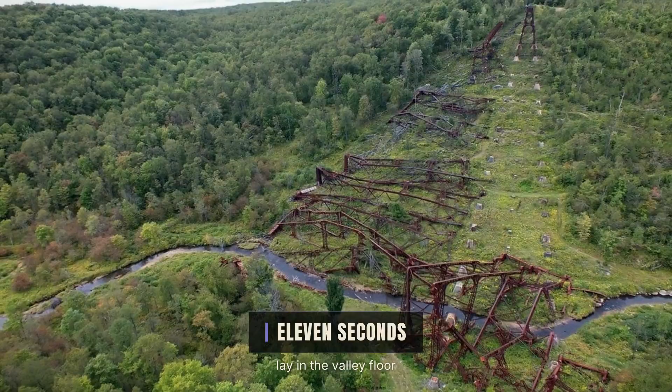At 3:15 in the afternoon on July 21st, 2003, the Kinzua Viaduct had already survived 121 years. It had carried 4-ton coal trains through Pennsylvania winters that froze the bolts in their sockets. It had outlived the railroad that built it, the company that rebuilt it, and the industry that made it necessary. 11 seconds later, 11 of its 20 towers lay in the valley floor, and the longest railroad bridge in the world when it was built had become a ruin.

The tornado that killed it was an F1, wind speed between 94 and 112 miles per hour, which this valley had seen before and survived. But at the base of the towers, where the anchor bolts held the steel to the concrete piers, rust had been working for decades. The bolts that should have held the structure to the earth did not hold. The towers that should have swayed and returned upright instead lifted, twisted, and dropped 225 feet to the sandstone bed below. The bridge was not empty that day by accident.

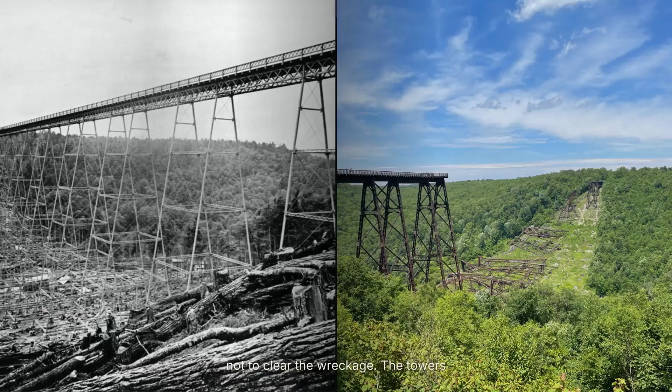A $10.8 million restoration project was underway, and the workers had been pulled off the structure. No one died. The National Park Service and the Pennsylvania Department of Conservation and Natural Resources made a decision afterward that still shapes the valley. They decided not to rebuild and not to clear the wreckage. The towers would stay where they fell, driven into the ground at angles the engineers who designed them never imagined, the rivets still tight in the iron, holding pieces together exactly as they had been assembled in the summer of 1882. Today, visitors walk the Kinzua Skywalk, a partial reconstruction that ends where the collapse begins.

They stand at the edge of what remains and look down at what came apart. The view is 301 feet to the valley floor, and on that floor, rusting in the open air, the towers lie exactly where they landed. The creek still runs beneath them. The hemlocks are growing back around them. The metal is turning the colour of dried blood.

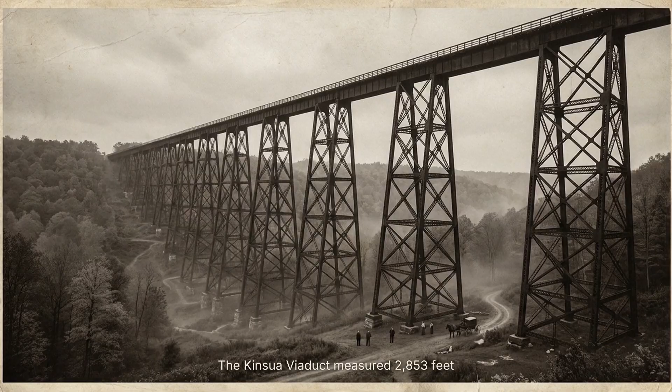The Kinzua Viaduct measured 2,053 feet from abutment to abutment. It crossed a tributary of the Allegheny River in McKean County, Pennsylvania, at a point where the valley walls drop away to a depth that made every alternative route unworkable. 301 feet. That was the number. Taller than the Statue of Liberty from base to torch. Taller than a 25-story building, and every foot of it in the original structure was wrought iron, pinned together by hand, hoisted into place by men whose names the railroad that hired them never bothered to record.

The collapse took 11 seconds. The construction took 94 days. The distance between those two numbers is the story. What kind of structure survives 121 years of Pennsylvania weather and 4-ton coal trains, then fails in 11 seconds to a storm that barely qualified as a tornado? The answer is in the valley floor. The answer is in the rust. The answer is in the decision made in the spring of 1882, when a railroad needed to cross a gap that should have been uncrossable, and a bridge company said it could be done in time that should have been impossible, and 120 men climbed into the air to prove them both right.

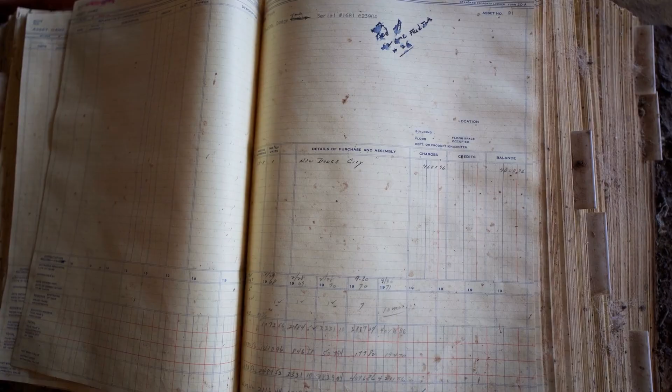The men who built the Kinzua Viaduct did not leave diaries. They did not write letters that survived. The railroad that employed them kept payroll books, not personnel records. What we know about them comes from the structure they left behind, from the wages the company recorded, from the 2 deaths that made the local newspapers, and from the physics of the work itself. The work tells you who they were. The work tells you what it cost them. The bridge stood for 121 years because they did it right. The bridge fell in 11 seconds because someone else, decades later, did not. But the falling is not where this story ends. The falling is where it begins.

In the spring of 1882, the New York, Lake Erie and Western Railway had a problem that was costing it money every hour of every day. The line connecting Buffalo to Pittsburgh ran through McKean County, and at Kinzua Creek the terrain forced a decision. The valley was 300 feet deep. The walls were steep. The creek at the bottom flooded every spring, scouring the sandstone bed and carrying debris downstream. There was no good place to build a conventional bridge. The supports would have to be impossibly tall, or the approach grades would have to be impossibly steep.

The existing solution was an 8-mile switchback. Trains heading south from Buffalo would descend into the valley on a series of grades that doubled back on themselves, cross the creek at the bottom, then climb out the other side on another series of switchbacks. The locomotives of 1882 could handle it, but handling it cost time. Every trip through the switchback added hours to the journey, every hour added cost. The coal coming out of the Bradford oil field was worth money only if it reached the furnaces in Pittsburgh before the customer found another supplier. The switchback was bleeding the railroad dry.

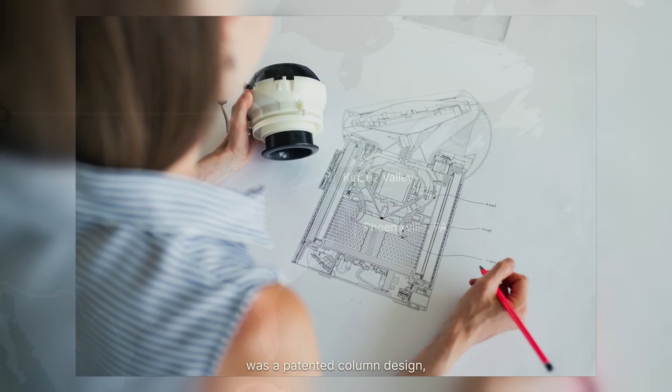The Phoenix Bridge Company operated out of Phoenixville, Pennsylvania, about 280 miles southeast of the Kinzua Valley. The company had built railroad bridges across the country, and its specialty was a patented column design, a hollow cylindrical shaft made of curved wrought iron segments bolted together around a central core. The Phoenix column was lighter than solid iron, stronger per pound than any competing design, and crucially it could be manufactured in sections small enough to ship by rail and assembled on site without heavy equipment.

The company's chief engineer was Adolphus Bonzano. When Kane asked him if the crossing was possible, Bonzano reportedly replied, "We'll build you a bridge 1,000 feet high if you'll provide the money." The quote appears in multiple accounts of the project, and whether or not Bonzano said it exactly that way, the sentiment was accurate. The Phoenix Bridge Company believed it could do what no one else had done. It believed it could cross the Kinzua Valley in a single span at a height that would clear the worst of the spring floods, in a time frame that would have the coal moving before the summer was over.

The contract was signed in the spring of 1882. The terms were specific. Construction would begin on May 10th. The bridge would be complete and ready for rail traffic by August 13th, 94 calendar days from the start of construction. The contract value was somewhere between $167,000 and $275,000, depending on which source you consult. The Erie Railway's annual report for 1882, filed with the New York State Railroad Commission, records a completion penalty clause, though the exact terms of that clause have been lost.

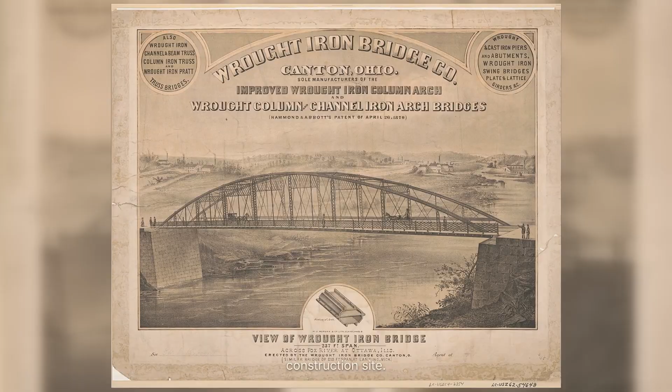Every piece of iron that would become part of the bridge had to be shipped by rail to the nearest siding, then hauled overland to the construction site. Every man who would drive a rivet or pin a connection had to be housed, fed, and paid in a valley that had no town, no store, and no infrastructure of any kind.

The Phoenix Bridge Company did not build scaffolding to the full height of the structure. Scaffolding 301 feet tall in a valley that flooded every spring, on a deadline that allowed no delays, was not a serious option. Instead, the company used a device of its own design, a piece of equipment that made the Kinzua Viaduct possible, and that has since disappeared from the engineering vocabulary so completely that most accounts of the bridge struggle to explain it. The device was called an erecting traveller.

The erecting traveller was a movable crane. It rode on the completed deck of the bridge itself, rolling forward as each new section was pinned into place. The traveller carried a gin pole, a tall mast that could be raised and lowered, and a bull wheel, a large drum that wound and unwound the hemp lifting lines. The gin pole could reach over the edge of the deck and lower its lines 301 feet to the valley floor. The bull wheel could lift a section of iron column from the ground to the working height without any scaffolding at all.

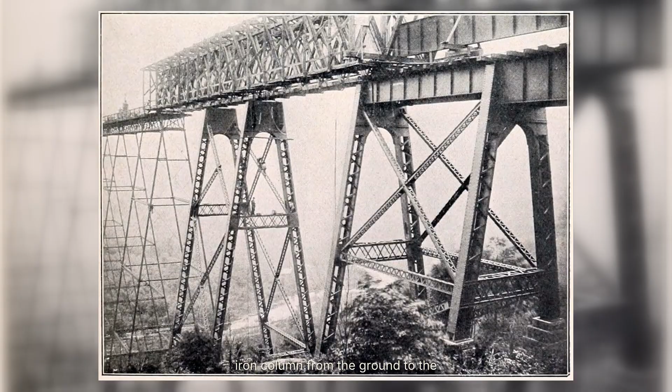The method worked because of the way the bridge was designed. The Phoenix columns arrived from the factory pre-drilled. Every bolt hole, every pinhole, every connection point was machined in Phoenixville before the iron ever left the shop. When a section reached the working elevation, the ironworkers did not have to measure, drill, or adjust. They swung the section into place, aligned the holes, and drove the pins.

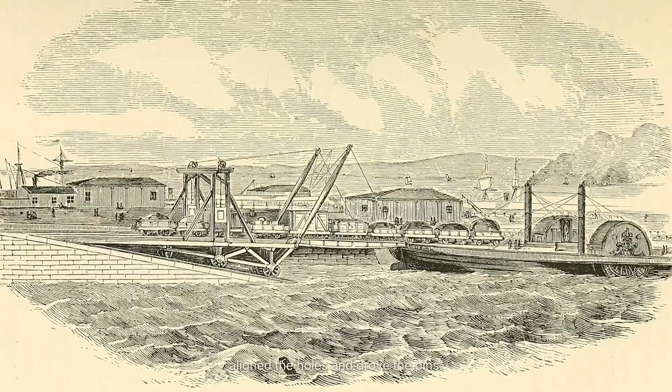The structure went up like a machine, not like a building. Each piece fit exactly where it was supposed to fit, because the drawings said it would, and the drawings had been checked and rechecked and checked again.

The shop drawings for the Kinzua Viaduct are held today at the Hagley Museum and Library in Wilmington, Delaware. They show the rigging configuration of the erecting traveller in precise detail. The hemp lines, the pulley blocks, the angles of the guy wires that kept the gin pole stable in the wind. The drawings were made by engineers who understood that a mistake on paper would become a death in the valley, and the ironworkers who executed them understood the same thing from the other end, because their lives depended on the engineers being right.

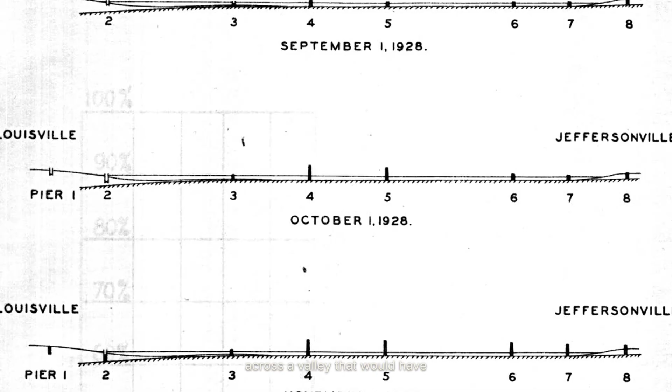The traveller solved the problem of height. It allowed men to work at 301 feet without building a 301-foot scaffold. It allowed the bridge to extend itself section by section across a valley that would have swallowed any conventional construction method. But the traveller did not solve the problem of what happened at the working elevation. The traveller did not solve the problem of the wind, or the weight, or the men themselves.

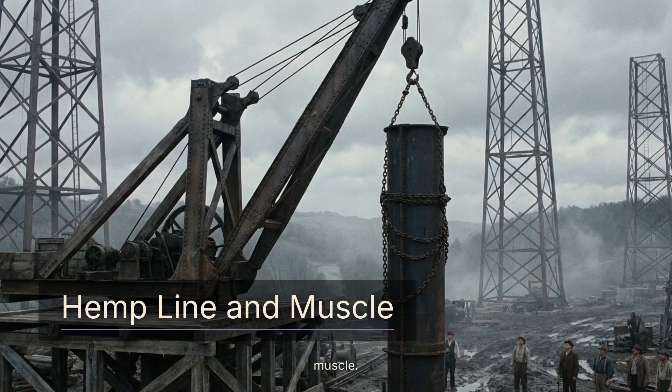The iron that made up the Kinzua Viaduct weighed approximately 3.5 million pounds. That weight had to be lifted piece by piece from the valley floor to the working deck, then swung into position and pinned before the next piece arrived. The lifting was done by hemp line and muscle. The positioning was done by ironworkers standing on temporary platforms no wider than a man's foot, reaching out over 301 feet of empty air to guide a swinging section of iron into its socket.

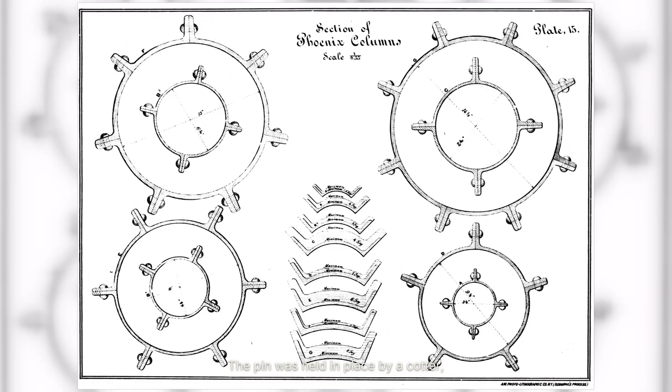The pin connections that held the structure together were not bolted. They were driven. A steel pin, machined to exact tolerances, passed through aligned holes in the column sections and the crossbeams. The pin was held in place by a cotter, and the cotter was driven by a hammer. An ironworker, standing at the height of a 25-story building, holding a hammer in one hand and a cotter in the other, drove the pin home while the structure beneath him swayed with the wind and the weight of the men on the deck above.

The bridge went up fast. The contract said 94 days, and the company intended to beat it. The work proceeded in shifts from first light to last. The traveller rolled forward as each bent was completed, its wheels grinding on the deck rails, its gin pole swinging out over the valley for the next lift.

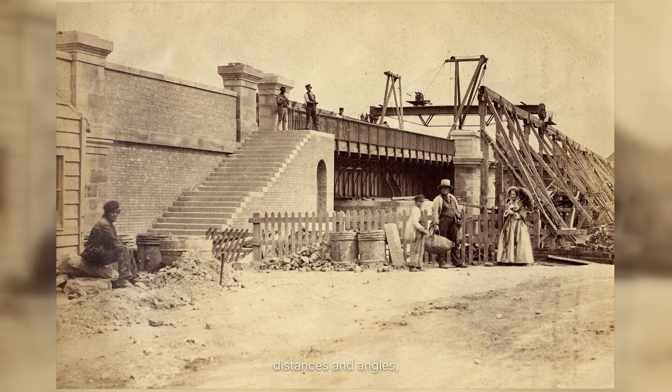The sound would have carried for miles in that terrain. The creak of the hemp under strain, the clang of iron meeting iron, the shouts of the riggers calling out distances and angles, and beneath it all, 301 feet below, the creek running over the sandstone indifferent to the structure rising above it.

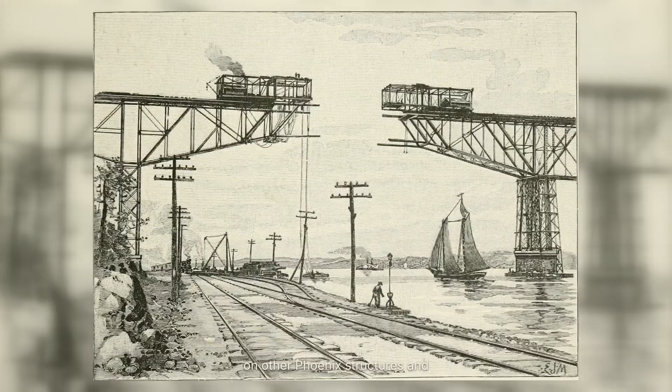The ironworkers who built the Kinzua Viaduct numbered approximately 120. The railroad's payroll records, such as they survive, do not include their names. The company tracked what it paid. It did not track who it paid. The men were recruited from ironworking crews across the northeast, experienced bridgemen who had worked on other Phoenix structures and understood the company's methods. Some of them had immigrated from Sweden, Germany, Ireland. Some of them had been born in Pennsylvania. All of them knew what they were doing, and all of them knew the risk.

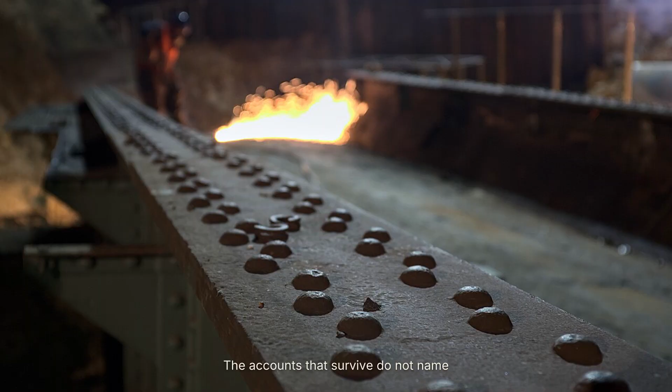Two of them died. The deaths occurred during rivet work. The accounts that survive do not name the men. They do not give the date. They do not describe the accident in detail. What they do say is that the men were working at height, somewhere above 200 feet, and that they fell. Whether they fell because a line broke, or a platform gave way, or they simply lost their footing on iron slick with morning dew, the records do not say. The railroad paid death benefits to their families. The work continued. The deadline did not move.

The wages the company paid were competitive for the era, but not generous. Ironworkers on the Kinzua project earned between $2 and $3 a day, depending on their skill level and the difficulty of the work. A riveter working at full height, driving pins into the topmost connections, earned more than a labourer hauling iron from the railhead.

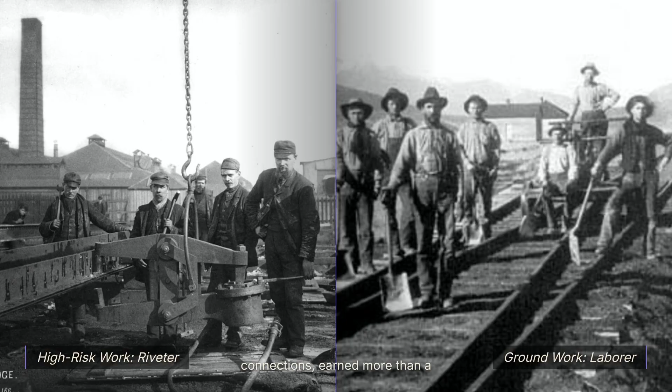A foreman earned more than a riveter. The pay structure tracked the risk. The higher you climbed, the more you were paid. The more you were paid, the more likely you were to be the one who fell. $3 a day was the upper end of the scale. That was roughly what a schoolteacher earned in a week in 1882.

In 1882, it was enough to feed a family, pay rent in a company town, and put aside a small amount for the winter months when the ironworks stopped. The men who climbed the Kinzua towers were not desperate. They were skilled. They could have found work elsewhere. They chose this job because the pay was good and the work was steady. They chose it knowing what had happened to the 2 men who fell.

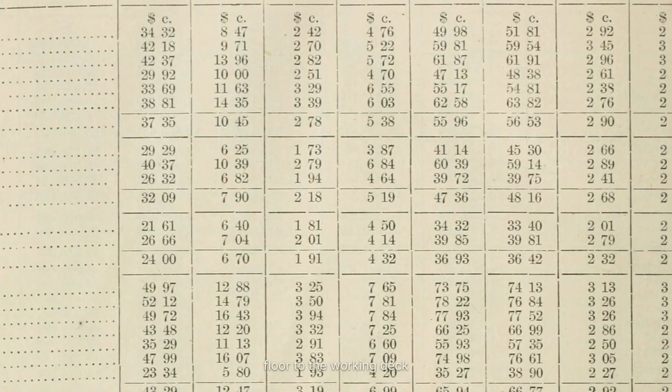The erecting traveller crept forward. The tower bents rose from the valley floor to the working deck, pinned together section by section, the Phoenix columns gleaming dull silver in the summer light. The hemp lines sang with the weight of the lifts, the bull wheel turned and the gin pole swayed, and 120 men, whose names the railroad never recorded, did the work that made the crossing possible.

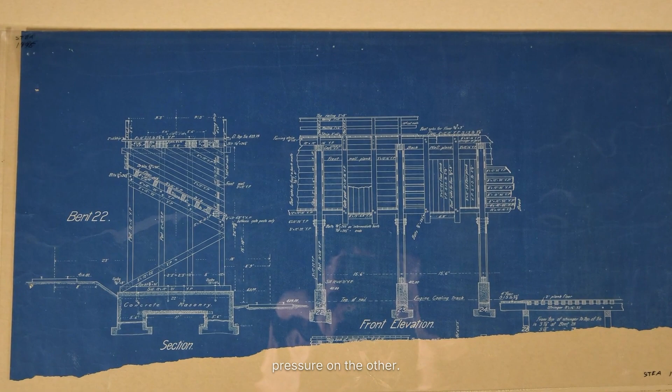The traveller solved the problem of height. It did not solve the problem of wind. It did not solve the problem of what happens to a 301-foot structure when the air pressure on one side of the valley differs from the air pressure on the other. It did not solve the problem of lateral force, the sideways push that a tornado or a gale or even a steady summer wind exerts on a structure that was designed to carry weight straight down.

The ironworkers of 1882 understood vertical force. They understood that the coal trains would push down on the deck and the deck would push down on the towers. What the bridge was not designed for, not in 1882 and not when it was rebuilt in 1900, was the lateral force of a tornado.

The anchor bolts that held the tower bases to the concrete piers were sized for vertical load and a modest allowance for wind. They were not sized for a rotating column of air moving at 94 to 112 miles per hour. They were not protected from the moisture that seeped into the concrete over 121 years and turned the steel to rust. They were, in the end, the weakest point in a structure that had no other weak points, but that failure was still 121 years away.

In the summer of 1882, the bolts were new, the iron was new, and the men driving the pins had no reason to think about what would happen to the bridge after they were dead. They had 94 days to finish the work. They had already lost 2 men. They had a traveller rolling forward and a valley to cross.

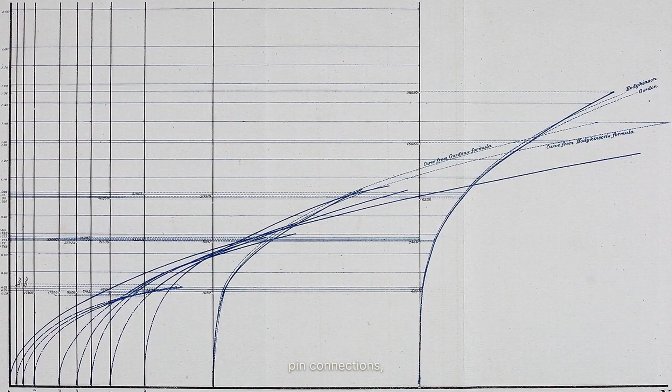The question the bridge answered in 1882 was not whether it could stand. The question was whether it could be built, whether 120 men with hemp line and hammers could assemble 3.5 million pounds of iron at a height of 301 feet in 94 calendar days. Whether the Phoenix Bridge Company's method, the erecting traveller, the pin connections, the pre-drilled sections, could actually work at this scale, in this terrain, on this schedule.

The bridge answered that question by August of 1882. The exact completion date is disputed. Some sources say August 13, the contract deadline. Some say August 29th. The company announced completion in the local newspapers, and the first train crossed before the summer was over. The switchback was abandoned.

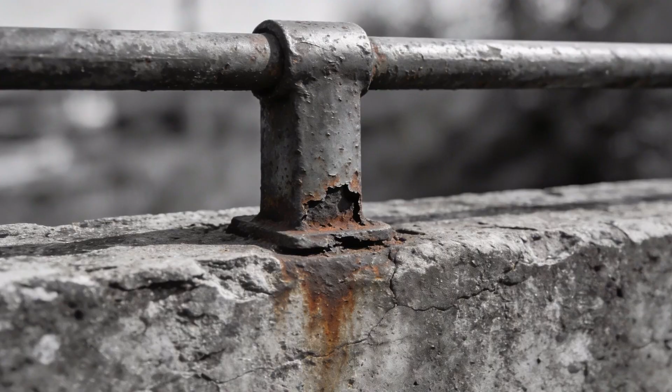The coal moved. What the bridge did not answer, what no one in 1882 was asking, was the question that the tornado would pose 121 years later. What happens to a structure built for vertical load when the force comes from the side? What happens to anchor bolts that have been rusting for a century? What happens to the tallest railroad bridge in the world when an F1 tornado, a storm that barely registers on the damage scale, crosses its path at exactly the wrong angle?

The towers in the valley floor are still answering that question. The rivets are still tight. The iron is still holding together, even in ruin. The bridge that fell in 11 seconds was the same bridge that stood for 121 years. The weakness was not in the structure. The weakness was in the connection to the earth.

The bridge was built to cross a valley. It was not built to survive being lifted out of its foundations by a rotating column of air. A railroad man, interviewed by the Bradford Era in 1900, the year the original iron structure was replaced with steel, said something that would prove prophetic.

"I don't like to cross the Kinzua Bridge," he said. "Some day during a severe storm or tornado that bridge will go down." He was right. It took 103 years, but he was right. The storm came, the bolts failed, the towers fell, and the men who built the original structure, the 120 ironworkers whose names the railroad never recorded, left behind a ruin that is more eloquent than any memorial.

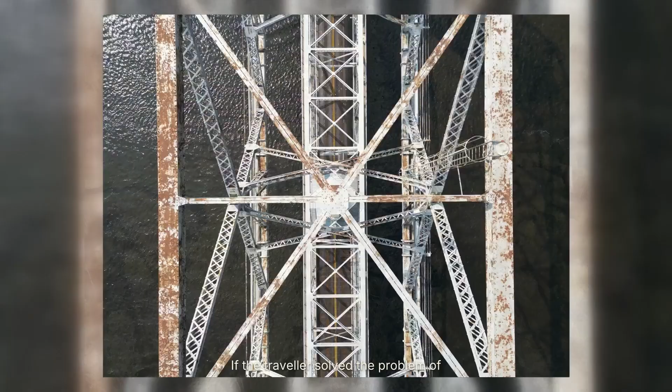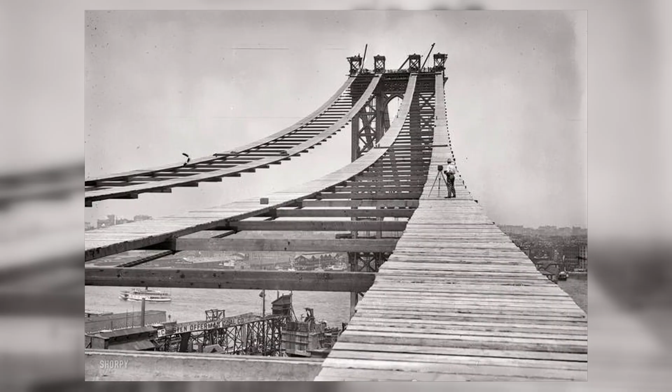The question that remains, the question that the rest of this story exists to answer, is simpler and harder. If the traveller solved the problem of height, what was the problem it did not solve? What happened at 200 feet, on the temporary platforms in the summer heat, with the hemp lines singing and the gin pole swaying and the deadline closing in? What did it cost to build a bridge in 94 days, and who paid that cost?

The 2 men who fell are still falling. The records do not say when they hit the ground. The records do not say who they were. The bridge remembers them in the only way a bridge can. It stands or it falls, and either way, the work that built it does not change.

The Erie Railway kept records of everything that moved on its tracks. Tonnage per car, miles per shipment, the cost of coal burned between Salamanca and Bradford. What the railroad did not keep, or did not keep where anyone could find it, was a list of the men who built the bridge that made those shipments possible. 120 ironworkers arrived in McKean County in May of 1882. They came from Sweden, from Germany, from Ireland, from the coal towns of western Pennsylvania.

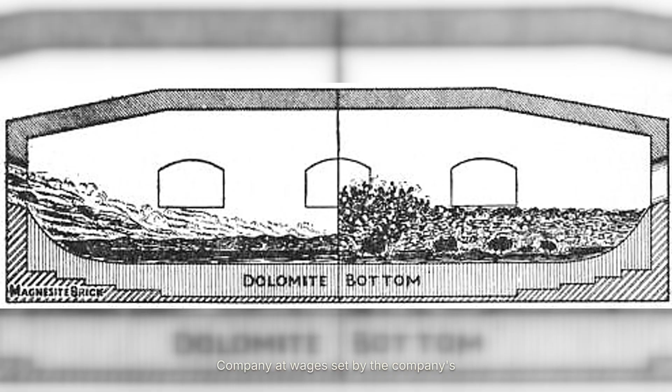They signed on with the Phoenix Bridge Company at wages set by the company's cost summary, the same document that would later be cited in Engineering News when the bridge was finished and the numbers were safe to publish. Common labour paid $2.25 a day, and skilled iron work paid $3.50. At $2.25 a day, a connector building the Kinzua Viaduct earned roughly what a Pennsylvania public school teacher earned in 4 days. At $3.50, a riveter earned what that teacher made in nearly a week. The money was good, but the work was not.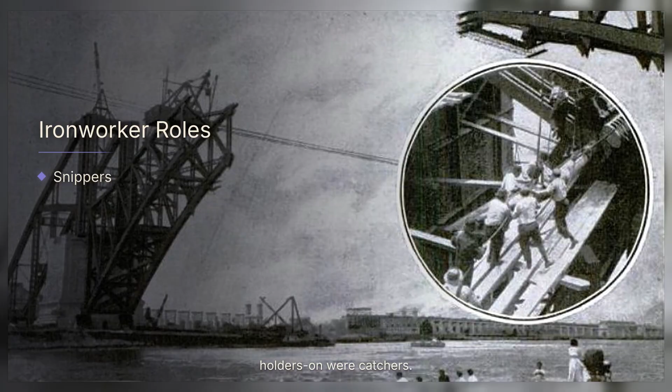The Phoenix Bridge Company's field records from this period use specific terms for the men who did specific jobs. The men who worked the springboards, the narrow planks suspended from the bents at working height, were called snippers. The men who caught red-hot rivets in metal buckets and passed them to the holders-on were catchers. The men who braced the rivets from behind while the riveters hammered the heads were holders-on. The men who swung the hammers were riveters. Every man had a title. No man had a name that survived.

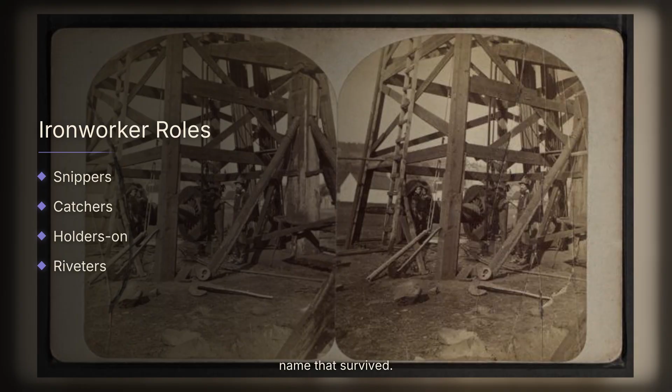The Erie Railway's payroll ledger for the Kinzua job, if it exists, has never been located in any public archive. Researchers have looked. The ledger is not in the McKean County Historical Society. It is not in the Pennsylvania State Archives. It is not in the collection of the Bradford Landmark Society, which holds documents from the oil boom and the lumber camps and the early coal shipments, but nothing from the bridge. The Phoenix Bridge Company's internal cost summary survives only because Engineering News reprinted the relevant figures in its October 1882 account of the viaduct's completion.

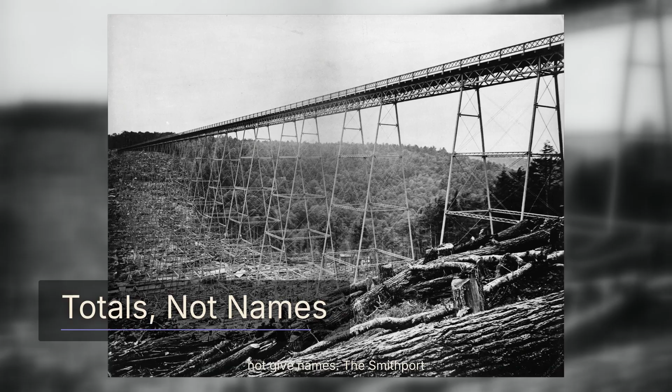The cost summary gives totals. It does not give names. The Smethport Civilian, the local newspaper that covered the bridge's opening, printed descriptions of the structure, the height, the span, the speed of construction. It did not print a list of the men who built it. The 120 ironworkers entered McKean County in May of 1882. They left in August, and somewhere between those two dates, the fact of their individual existence was erased from the documentary record. This was not unusual for the period.

Railroad companies did not consider construction labour worth recording in the same ledgers that tracked revenue and expense. The men were a cost, and the cost was noted, but the men themselves were not. What survives from the Kinzua construction is the bridge itself, the Engineering News account, the cost summary, and 2 entries in the McKean County Coroner's docket for the summer of 1882. 2 entries, 2 names. The only names of any Kinzua ironworker to appear in a surviving official document are the names of the 2 men who died.

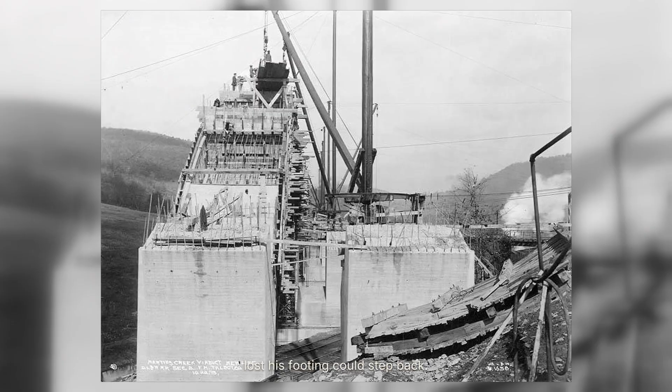The rivet sequence at 200 feet worked the same way it worked at ground level, except that at ground level a man who lost his footing could step back. At 200 feet, there was no stepping back. There was the springboard plank 18 inches wide bolted to the bent at a height that put the work at arm's reach. There was the hemp safety line, available to any man who wanted to tie off before he started catching.

Most men did not use it. The line slowed the catch. The catch had to be fast because the rivet was cooling the moment it left the forge, and a cold rivet would not seat properly, and a rivet that did not seat properly would have to be drilled out and replaced, and drilling out a rivet at 200 feet took time the crew did not have.

The deadline was August 13th. The traveller was moving forward, the towers were rising, the rivets had to move. A rivet gang was 4 men. The heater stood at the portable forge, a coal-fired box mounted on the platform, and he pulled the rivets from the fire with tongs when they glowed the right colour. A dull cherry red that meant the iron was soft enough to head but not so soft it would deform under the hammer. He tossed the rivet to the catcher.

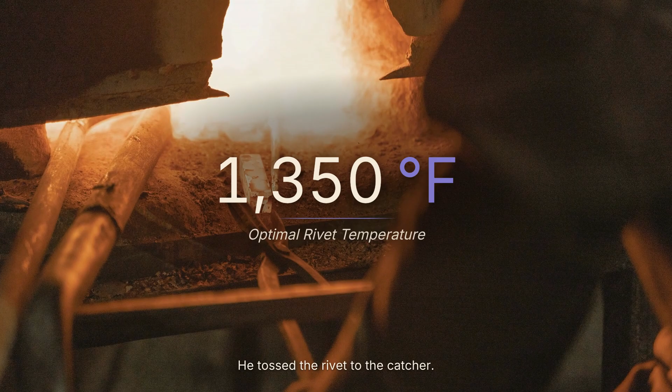The toss was underhand, a gentle arc across 6 or 8 feet of open air, and the catcher took it in a metal bucket shaped like a cone, the hot iron landing with a sound like a bell struck underwater. The catcher pulled the rivet from the bucket with his own tongs and passed it to the holder-on. The holder-on slid the rivet into the hole, shank first, and braced it from behind with a dolly bar, a heavy iron rod with a cupped end that fit over the rivet head.

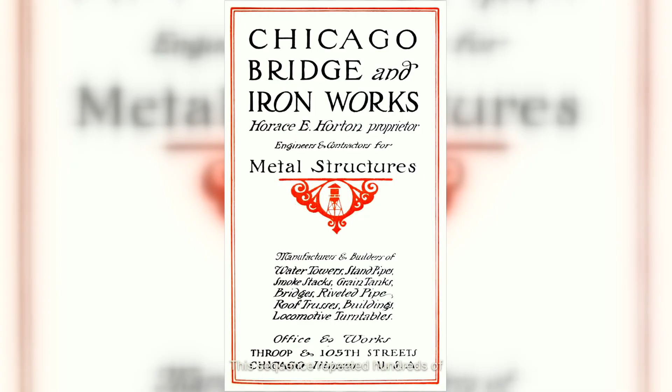The riveter swung the hammer. 4 blows, 5, 6, and the head was formed, and the holder-on pulled back and the catcher was already reaching for the next throw. This sequence repeated hundreds of times a day. The sound of it carried down to the valley floor, a rhythmic clanging that the farmers in the fields below could hear from a mile away.

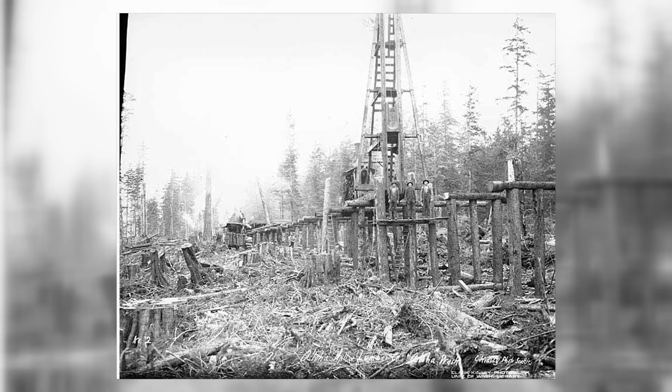The smoke from the portable forges rose in thin columns along the line of the viaduct, marking the progress of the work. At 200 feet, with the wind coming up from the Kinzua Creek, the smoke blew sideways and the men worked in a haze of coal ash and iron scale. The springboard planks vibrated with every hammer blow. The hemp lines, for the men who used them, swayed with every shift of weight.

The towers themselves, not yet fully braced, moved slightly in the wind, a movement so small it was almost imperceptible, except that at 200 feet a movement of half an inch at the base became a movement of several inches at the top, and a man standing on a plank at the top could feel the whole structure breathing beneath him.

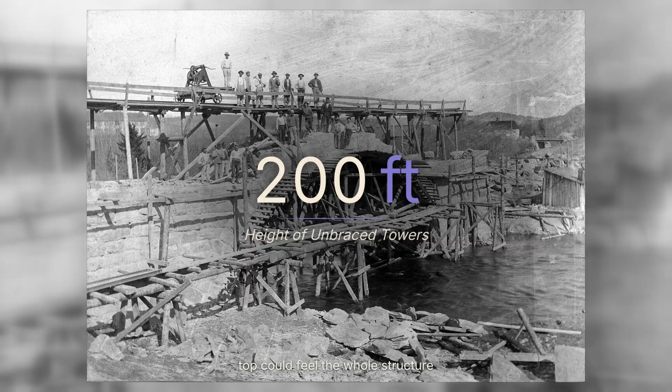Phoenix Bridge Company accident reports from comparable jobs in the same period, held at the Hagley Museum and Library in Delaware, describe the mechanisms of death at height. The reports are clinical. They note the position of the body, they note the condition of the equipment, they note the weather, the time of day, the phase of construction. What they do not note, because they were written for internal company use, is the experience of the fall.

The reports say a man fell. They do not say what he saw as he went down, or what he heard, or whether he had time to understand what was happening before he hit the ground. The McKean County coroner's docket for summer 1882 records 2 deaths attributed to the Kinzua construction. The docket gives names, which I will not invent here because I have not seen the original document, and the names have not been published in any source I can verify.

The docket gives cause of death. Fall. The docket does not give mechanism. It does not say whether the man slipped, or whether the plank broke, or whether a rivet throw went wide and the catcher reached too far. The docket says what the coroner could see when he examined the body. It does not say what happened in the seconds before.

What the Phoenix Bridge Company reports from other jobs suggest is that the mechanisms were various. Men fell because planks failed. Men fell because hemp lines snapped. Men fell because they leaned out to catch a throw, and their weight shifted past the point of recovery. Men fell because they were tired, because the work went on for 10 hours a day in the summer heat, because the forge smoke made it hard to breathe and the coal ash got in their eyes.

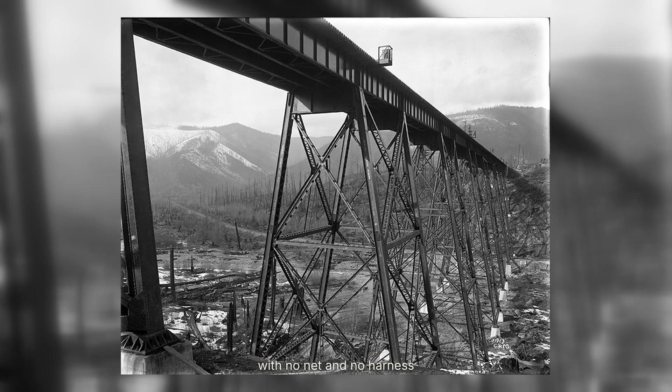Men fell because the towers swayed and they lost their balance. Men fell because another man on the platform moved at the wrong moment and the whole assembly shifted. Men fell because falling was what happened when you worked at 200 feet with no net and no harness and no safety system beyond a hemp line that most men did not use.

The 2 men in the McKean County docket fell sometime between May 10th and August 7th of 1882. The exact dates are not recorded in any source I have found. What is recorded is that they fell, and that they died, and that their names appeared in the coroner's ledger, and that those names are the only names of any Kinzua ironworker that appear in any surviving official document.

The Erie Railway did not record them. The Phoenix Bridge Company did not publish them. The Smethport Civilian did not print them. The coroner wrote them down because the coroner's job was to account for the dead, and accounting for the dead meant writing down names.

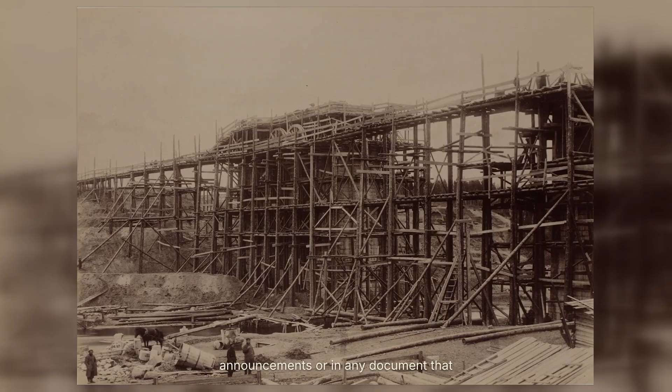When the viaduct was declared complete, the question of what the dead men's families received, and from whom, was not answered in the engineering news account or in the Erie Railway's press announcements, or in any document that has been located in the decades since.

The Phoenix Bridge Company's accident reports from comparable jobs suggest that families sometimes received a payment, a settlement calculated by the company's lawyers to forestall any legal action. The amounts varied. The terms were not disclosed. What is known is that the men died, the bridge was finished, and the work continued without them.

On August 29, 1882, the Kinzua Viaduct was declared complete. Some sources cite August 7 as a milestone, a date when the structure was sufficiently finished that the company could claim it had met its deadline with days to spare. The distinction matters less than what both dates represent.

The bridge was done, 94 days of construction, 120 men, 3.5 million pounds of wrought iron, stretched across 2,053 feet of span and 301 feet of height, and 2 names in a coroner's docket. The engineering news account from October 1882 gives the total cost at $167,000.

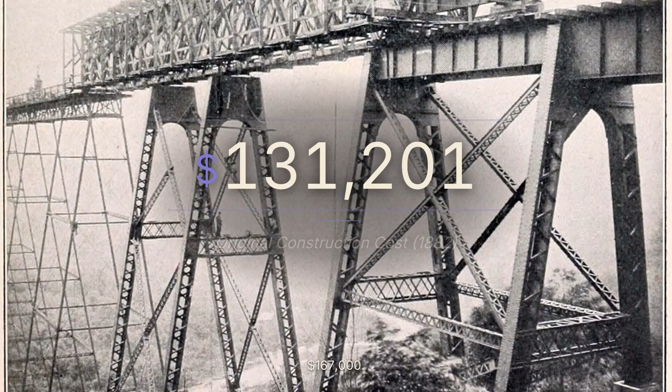In 2024 purchasing power, that figure translates to roughly $5.1 million, though the translation is imprecise because the goods and services that money could buy in 1882 do not map cleanly onto the economy of the present. What $167,000 bought in 1882 was a bridge, complete, standing, capable of carrying loaded coal trains across a valley that had blocked the Erie Railway's expansion for years.

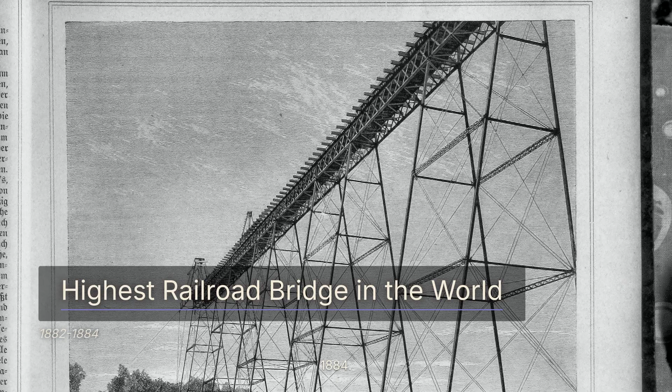What $167,000 did not buy, or what the railroad did not choose to record, was the names of the men who built it. The Erie Railway issued a press circular after the bridge was finished. The circular called the Kinzua Viaduct the highest railroad bridge in the world, a title the structure would hold until 1884. The circular described the engineering achievement, the speed of construction, the elegance of the design. The circular praised Octave Chanute and the Phoenix Bridge Company.

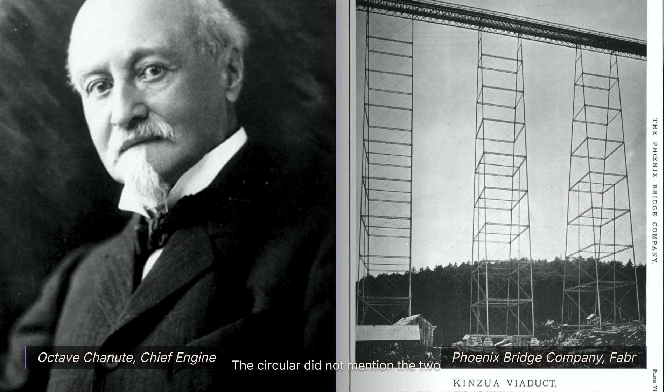The circular did not mention the 2 men in the McKean County coroner's docket. The circular did not mention the labour cost per worker. The circular did not mention the names of anyone who had built the bridge, except for the engineers and the company executives who had never stood on a springboard plank at 200 feet. This was the document, and this was what the railroad chose to announce: a bridge, a height, a record, a title.

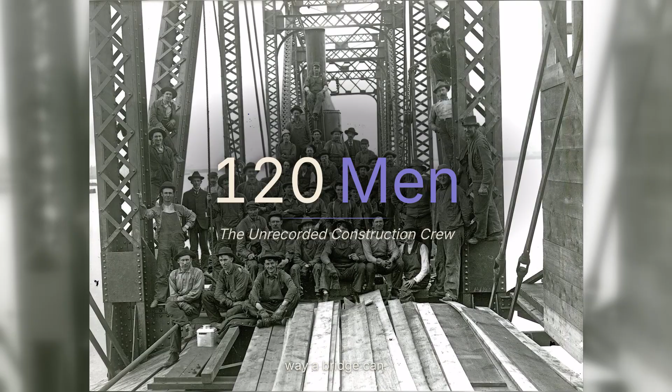Beneath those words, in the silence where the names should have been, was the fact of 120 men who came to McKean County in May, and left in August, and left behind a structure that would stand for 121 years. The bridge remembered them the only way a bridge can. It stood and carried the trains and did the job it was built to do. The men who built it became part of the iron, part of the structure itself, their labour preserved in every rivet and every pin connection, while their names were erased from every record that anyone thought to keep.

The Smethport Civilian covered the opening. The Bradford Era ran accounts of the first trains crossing. The engineering journals published diagrams and cost summaries and descriptions of the erecting traveller. What none of them published was the thing that would have made those 120 men real. The list of names, the countries of origin, the ages, the families.

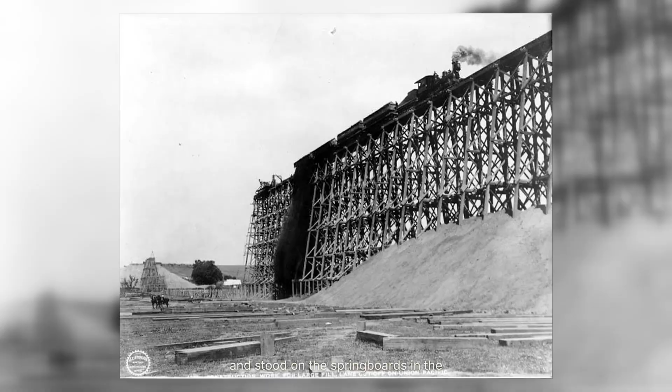The men existed as a labour cost. They existed as a workforce. They existed as the hands that drove the pins and caught the rivets and stood on the springboards in the July heat. They did not exist as individuals whose stories could be told.

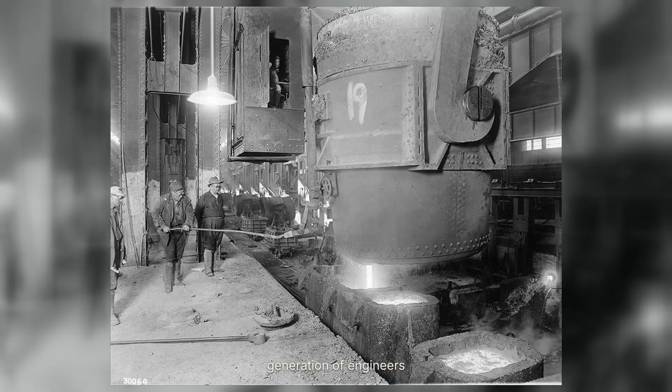The viaduct that stood on August 29th, 1882, was not the viaduct that fell on July 21st, 2003. The iron structure of 1882 was dismantled and rebuilt in 1900, replaced with steel by a later generation of engineers who understood that wrought iron had limits that steel did not share.

The towers that the tornado brought down were steel towers, standing on foundations that had been poured in the 1880s, anchored by bolts that had been rusting for a century by the time the wind found them. The bridge that fell was twice built, a structure that carried within it the memory of two constructions, two sets of workers, two moments in the history of American engineering.

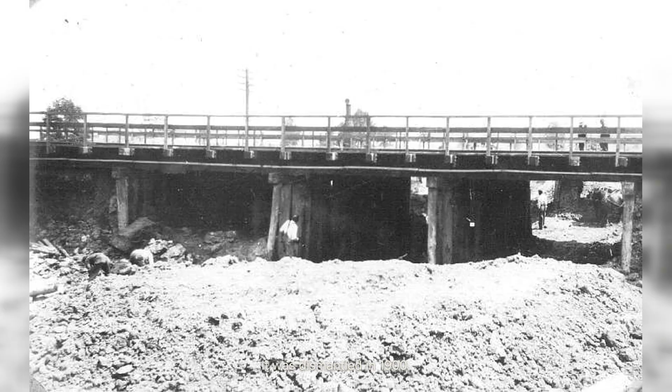But the original bridge, the bridge that Chanute designed and Bonzano supervised and 120 unnamed men assembled in 94 days, that bridge was gone long before the tornado came. It was dismantled in 1900. The iron was scrapped. The pin connections were pulled apart and melted down for other uses. What survived from 1882 was the stone piers, the concrete foundations, and the documentary record, incomplete as it was. What survived was the engineering news account, the cost summary, and two names in a coroner's docket.

The 1900 rebuild would change the bridge completely. The steel structure that replaced the iron structure was heavier and stronger, designed to carry loads that the original bridge could never have supported. The trains that crossed the Kinzua Viaduct in 1950 were not the trains that crossed it in 1882, because the loads were different, the speeds were different, and the economics of coal transport had shifted in ways that the men who built the original bridge could not have imagined.

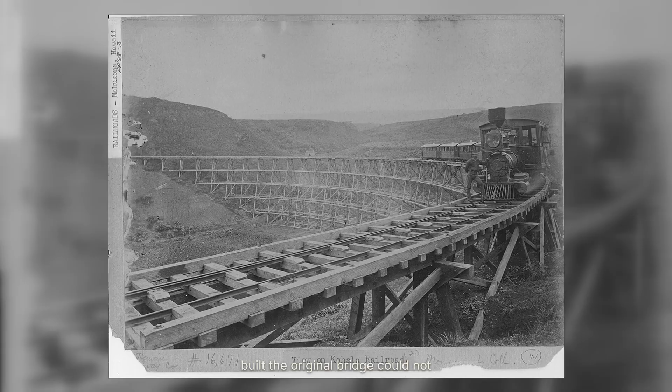But the foundations remained, and the piers remained, and the anchor bolts that connected the steel towers to the concrete beneath them remained in place, rusting slowly, year by year, decade by decade, until the day in July 2003, when the wind came and the rust gave way.

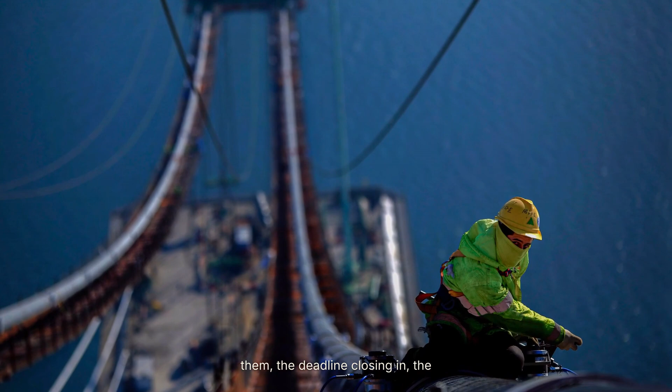The men who built the 1882 bridge did not know that their work would be dismantled in 18 years. They did not know that the iron they riveted together at 200 feet would be pulled apart and replaced with steel before the new century began. They knew only the work in front of them, the deadline closing in, the traveller rolling forward, the rivets glowing cherry red in the forge. They knew the springboard planks and the hemp lines and the sound of the hammer against iron. They knew the two men who fell. They knew what it cost to build a bridge in 94 days.

The 1900 rebuild happened because the bridge was dying. The bridge wasn't failing in any dramatic sense. It wasn't collapsing or cracking. The wrought iron that Chanute had specified in 1882 was doing exactly what wrought iron does under repeated stress. It was fatiguing. The microscopic fibres within the metal were separating slowly, invisibly, under loads that the original design had never anticipated. In 1882, a freight locomotive weighed perhaps 40 tons.

By 1900, the same Erie Railway was running engines that weighed 70 tons, 80 tons, machines that would have seemed impossible to the men who stood on the springboards 18 years earlier. The bridge that had been the tallest railroad structure in the world was now an engineering problem. It could not carry the future that the railroad needed it to carry.

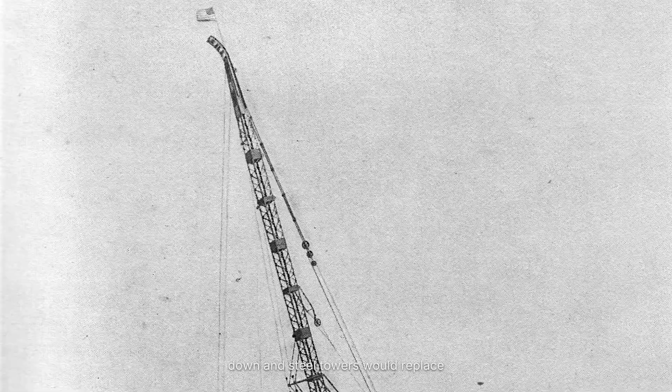The Erie Railway's chief engineer in 1900 was a man named C.W. Buchholz. His name appears in the company records, in the engineering specifications, in the contracts that authorized the work. Unlike the 120 men who built the original bridge, Buchholz left a documentary trail. He understood what needed to happen. The iron towers would have to come down and steel towers would replace them. The masonry piers, the stone foundations that the 1882 crews had laid before the iron went up, those would remain. The piers were sound. The concrete was sound. What had changed was the metal, and the metal could be changed again.

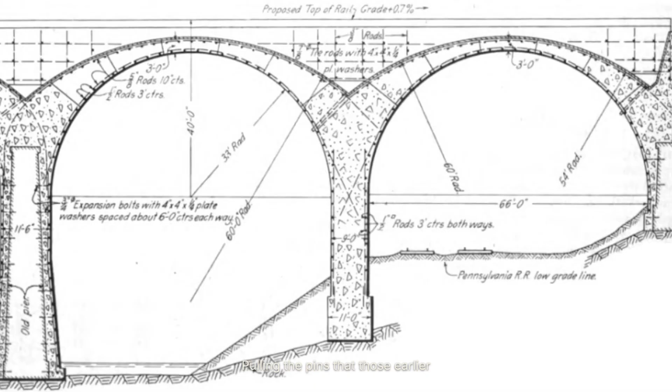The Elmira Bridge Company won the contract. Work began on May 24, 1900, 18 years and 2 weeks after the original construction had started. The crew numbered somewhere between 100 and 150 men, depending on which account you trust. They worked through the summer, dismantling the iron structure that had stood since 1882, pulling the pins that those earlier crews had driven, lowering the columns that had been raised by the erecting traveller. The iron went to scrap. It was melted down, recast, turned into other things.

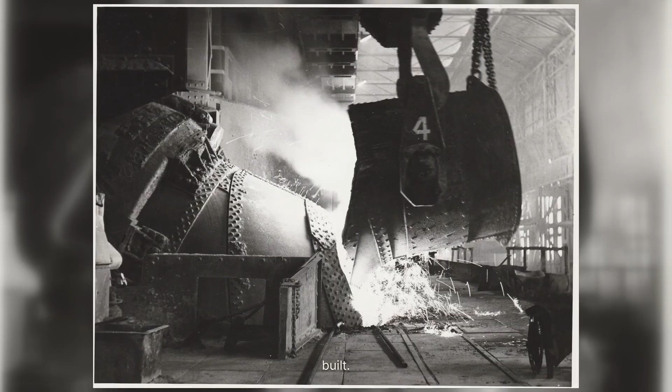The physical substance of the 1882 bridge, the actual metal that the unnamed workers had touched and shaped and riveted, ceased to exist as a bridge and became raw material for whatever the foundries needed next. In its place rose steel, open hearth steel, a different metallurgy entirely, produced by a process that had barely existed when the original bridge was built. The new towers were heavier. The new structure weighed 6.7 million pounds, more than double the 3.1 million pounds of the original iron viaduct. The dimensions remained the same, 2,053 feet long, 301 feet high, because the piers remained the same.

But the bridge itself was new, a different structure standing on the same foundations, carrying the same railroad across the same valley, serving the same economic purpose. The name remained, and the location remained, but the bridge, in every material sense, did not. The new steel structure opened for traffic on September 25, 1900. The project had taken 105 days, 11 days longer than the original construction.

The men who built the steel bridge are no better documented than the men who built the iron bridge. Their names do not appear in the records that survive. The pattern held. The railroad recorded what it needed to record: costs, timelines, engineering specifications, the weight of the steel and the diameter of the pins. The men who did the work remained a labour category, not a collection of individuals.

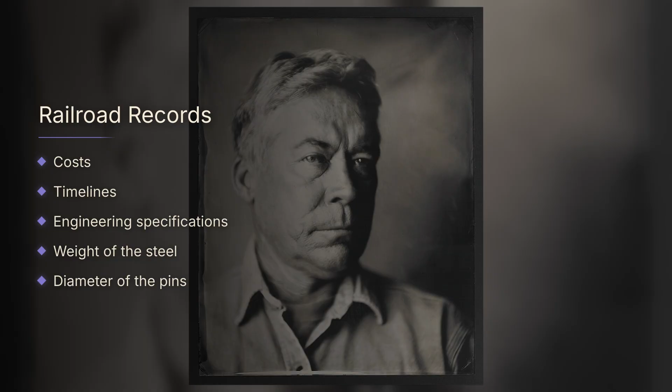But there was one difference in the 1900 rebuild that would matter a century later. The new steel towers sat on the original foundations, and the original foundations were anchored by the original bolts. The iron anchor bolts that the 1882 crews had set into the concrete, the bolts that held the first towers in place, those bolts were not replaced. They were reused. The steel towers of 1900 stood on iron anchors from 1882, two metallurgies joined together, two eras of engineering connected at the base.

Someone noticed. A railroad man, his name not recorded, looked at the plans or looked at the work in progress and made a prediction. Someday during a severe storm or tornado, he said, that bridge will go down. The quote survives in the historical record, attributed to no one in particular, a piece of anonymous foresight that would take 103 years to prove correct.

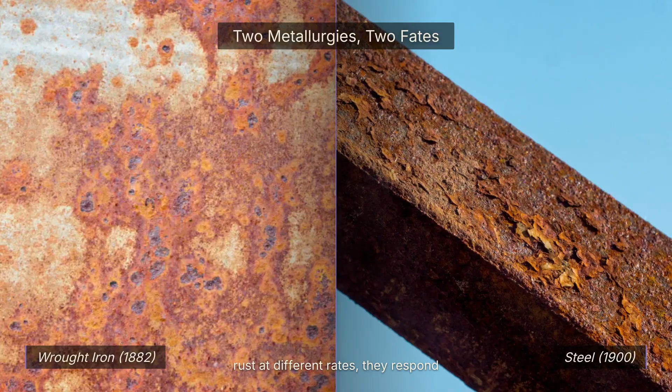The man who said it understood something that the engineers either did not understand or chose to ignore. Iron and steel age differently. They rust at different rates. They respond to stress in different ways. Connecting them at the most critical point in the structure, the point where the towers met the earth, was a decision that traded present convenience for future risk.

The rebuilt viaduct carried trains for 59 years. The Erie Railway ran freight across it until 1959, when the economics of rail transport shifted again and the line was discontinued. The bridge stood empty after that, a structure without a purpose, maintained by no one, visited by hikers and photographers who came to see the tallest railroad bridge that no longer carried trains.

The state of Pennsylvania acquired the site in 1963 and turned it into Kinzua Bridge State Park. The bridge became a monument to itself, a tourist attraction, a place where people could walk out onto the deck and look down 301 feet into the valley below. For 40 years the steel bridge stood in the park. The anchor bolts rusted, the pins corroded.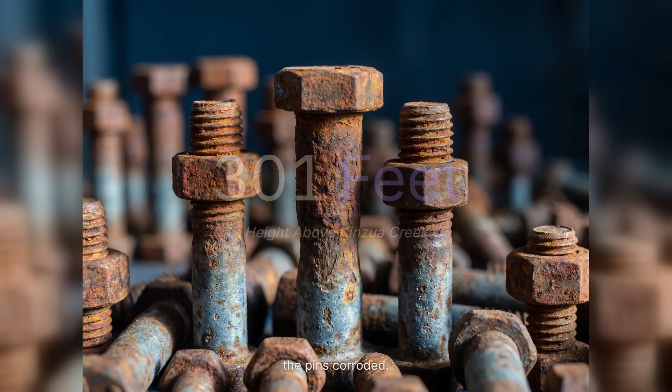The structure that had been built for motion, for the dynamic stress of locomotives crossing at speed, now stood in stillness, which is its own kind of stress. Metal that moves stays limber, but metal that sits grows brittle. The bridge was aging in ways that no one was measuring, because no one was responsible for measuring it. The state maintained the deck. The state maintained the approaches. The anchor bolts, buried in concrete, invisible, were not part of anyone's inspection routine.

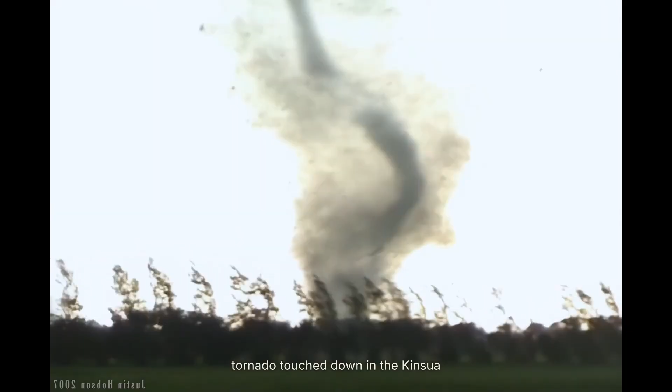July 21, 2003 was a Monday. The weather that afternoon was unstable, the kind of summer atmosphere that breeds thunderstorms in the Allegheny Highlands. At 3:15 in the afternoon, an F1 tornado touched down in the Kinzua Creek Valley. The wind speed was somewhere between 94 and 112 miles per hour, strong enough to strip shingles from roofs and snap tree branches, not strong enough to level buildings or overturn cars. An F1 is a minor tornado by the standards of the Great Plains. It is not the kind of storm that destroys bridges.

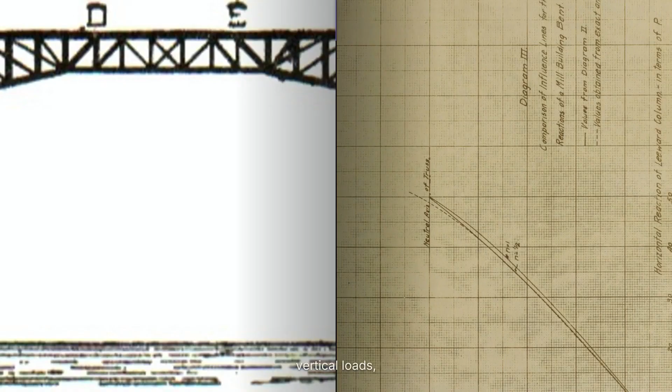But the Kinzua Viaduct was not a building or a car. It was a structure designed to resist vertical loads, the weight of locomotives pressing down through the towers into the foundations. It was not designed to resist horizontal loads, the sideways force of wind pushing against the open lattice of the steel columns. The tornado hit the bridge broadside. The wind found the anchor bolts. The anchor bolts, 121 years old, iron in a steel structure rusted through at the base, gave way.

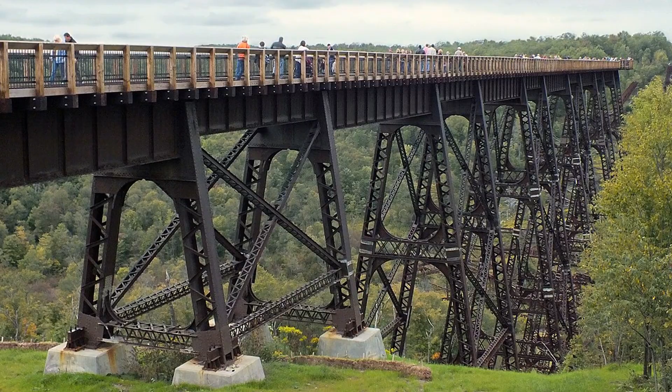11 towers fell in 11 seconds. The collapse began at the south end and propagated north, each tower pulling the next as the pin connections did exactly what pin connections do. They transferred force. They spread the failure from one section to the next. The towers did not crumble or shatter. They fell as units, still connected at the pins, still holding their shape as they dropped 301 feet into the valley below.

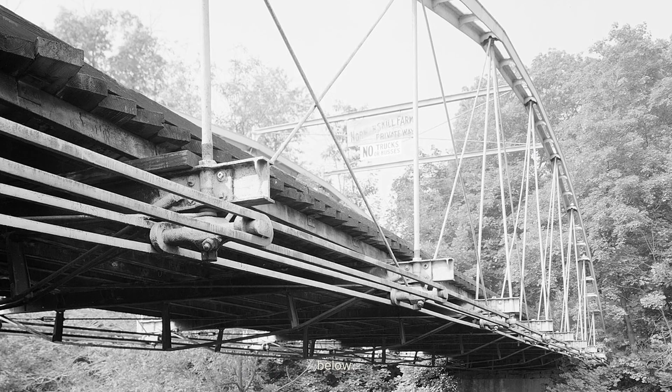The remaining 9 towers, the ones whose anchor bolts held, stood at the north end of the viaduct, connected to nothing, a row of steel columns ending in empty air. The tornado that destroyed the Kinzua Viaduct was on the ground for less than a minute. It travelled perhaps half a mile before it dissipated, and the damage it caused, other than the bridge, was minimal. A few trees down, some debris scattered across the hillsides. The storm was not remarkable, but the destruction was.

A structure that had stood for 121 years, that had been called the 8th wonder of the world, that had carried thousands of trains across a valley that no other engineering solution could have crossed, was reduced to wreckage in the time it takes to count to 11. The news coverage focused on the bridge. The photographs showed the twisted steel, the fallen towers, the gap in the structure where 11 sections had stood that morning and now lay in the valley below.

What the coverage did not mention, because the coverage did not know, was the distinction that mattered. The bridge that fell was not the bridge that was built in 1882. The bridge that fell was the steel replacement, the 1900 structure, 103 years old on the day the tornado came. The Iron Bridge, the bridge that Chanute designed and Bonzano supervised, and 120 unnamed men assembled in 94 days, that bridge had been gone for a century. It had been dismantled and scrapped and melted down before anyone alive in 2003 was born. The tornado destroyed the second bridge. The memory it evoked was the first.

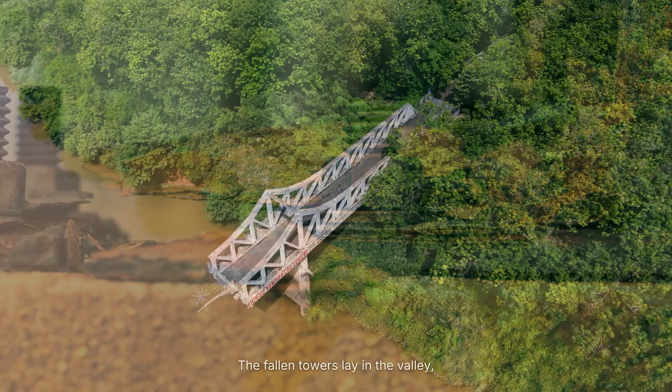After the collapse, the Pennsylvania Department of Conservation and Natural Resources faced a decision. The fallen towers lay in the valley, 11 sections of steel lattice scattered across the forest floor, still connected at the pins, still holding the shape they had held when they stood. The state could remove them. It could hire crews to cut the steel apart and haul it out of the valley, to clear the wreckage and restore the site to something like its natural condition. It could treat the collapse as a disaster to be cleaned up, an embarrassment to be erased. The state chose not to.

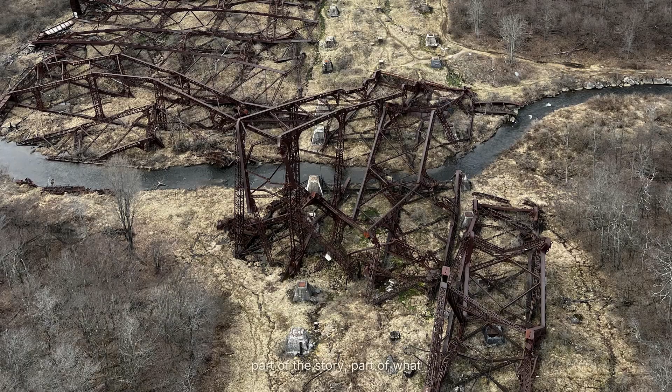The decision, documented in the DCNR's interpretive plan for Kinzua Bridge State Park, published in 2011, was to leave the wreckage where it fell. The fallen towers would remain in the valley. They would become part of the site, part of the story, part of what visitors came to see. The ruin would be preserved as a ruin. The choice was not sentimental. It was interpretive. The collapsed towers told a story that the standing towers could not tell.

They showed what happens when metal fails. They showed how a pin-connected structure comes apart, each section still joined to the next, the engineering logic visible even in destruction. They showed the scale of the thing, the weight of it, the height from which it fell. A visitor standing next to a fallen column, looking up at the twisted lattice of steel, could understand the bridge in a way that a visitor standing on the deck never could. The ruin made the structure legible.

Today, visitors to Kinzua Bridge State Park can walk out onto the Kinzua Skywalk, a glass-floored observation platform built on the remaining 9 towers at the north end of the viaduct. They can stand 301 feet above the valley floor and look south, across the gap where the 11 towers once stood, to the trees on the far side. They can look down through the glass and see the forest below, the creek winding through the valley, the wreckage of the fallen towers scattered among the trees, and they can hike down into the valley. A trail leads from the parking area to the forest floor to the place where the towers came to rest.

The steel lies where it landed. The columns are bent but not broken. The pin connections, the same pin connections that the 1882 crews drove and the 1900 crews reused, still hold the sections together. The structure that fell as a unit lies as a unit, a monument to the engineering that built it and the rust that destroyed it.

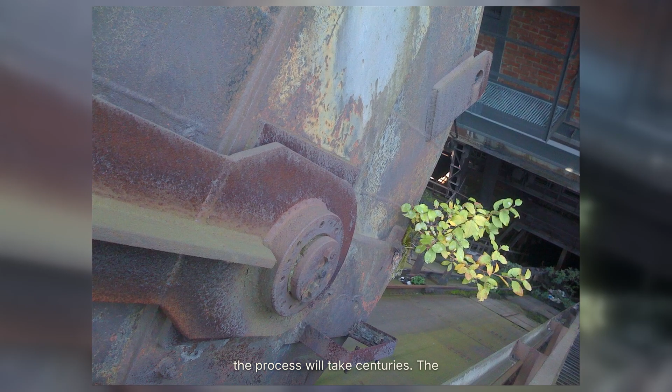The valley is quiet. The creek runs over rocks that were there before the bridge and will be there long after the last of the steel has rusted away. The forest has begun to reclaim the wreckage, vines climbing the lattice, moss growing on the horizontal surfaces, the slow, patient work of decay that will eventually reduce the steel to oxide and the oxide to soil. The process will take centuries. The bridge that took 94 days to build will take 300 years to disappear.

Standing in that valley, next to columns that fell 225 feet and landed with enough force to drive themselves into the earth, a visitor confronts a particular kind of absence. The men who built the original bridge in 1882 left no names. The men who rebuilt it in 1900 left no names. The railroad man who predicted the collapse left no name.

The tornado that brought the towers down had no witnesses, no one standing in the valley at 3:15 on that Monday afternoon to watch the steel come apart. The collapse happened in solitude. 11 seconds of destruction, with no one there to see it. The parallel is not accidental. The bridge was built by men whose individual existence the railroad did not bother to record. It fell in a moment that no individual witnessed.

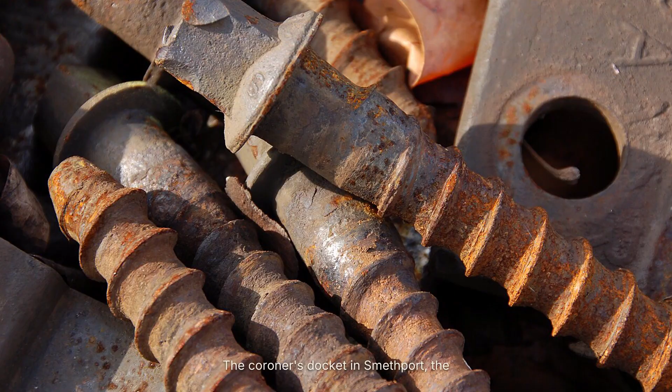The two absences rhyme. The valley holds both of them, the unrecorded labour of 1882 and the unwitnessed destruction of 2003, and it holds them equally, without preference, without judgment. The ground does not care about names. The ground receives what falls and keeps it. The coroner's docket in Smethport, the one that records the 2 deaths during the original construction, is still there. The names are still legible.

2 men who fell from the springboards, who died doing rivet work at 200 feet, who were buried somewhere in McKean County in graves that may or may not still be marked. Their names survived because death required documentation. Their lives, their work, their skill with a rivet hammer or a forge, none of that survived. They exist in the record as casualties, not as craftsmen. The 118 men who did not fall are not in the docket. They are not anywhere. They finished the bridge and collected their wages and walked away into lives that left no trace in the documentary record.

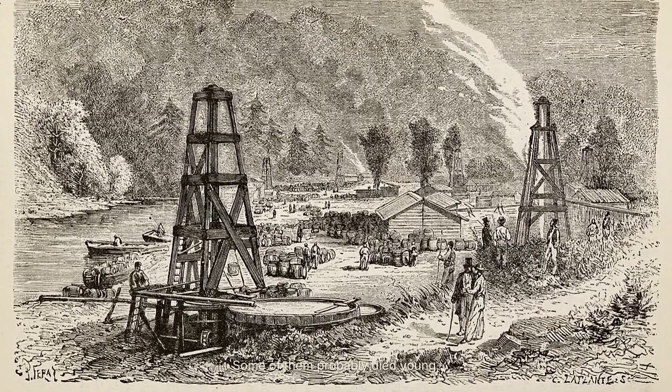Some of them probably worked on other bridges, other railroad projects, other structures that required men willing to stand on planks at 200 feet and catch rivets thrown from below. Some of them probably went back to the coal mines, to the lumber camps, to the farms and factories that employed men who could work with their hands. Some of them probably died young, because men who did that kind of work often did. None of that is recorded. None of that can be known.

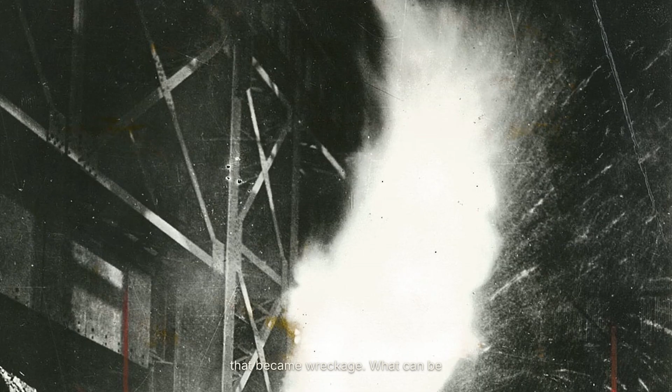What can be known is the bridge. What can be known is the iron that became steel, that became rust, that became wreckage. What can be known is the valley, the creek, the forest, the fallen towers lying where they landed. The men who built the bridge are gone. The bridge they built is gone. The bridge that replaced it is half gone. 9 towers standing and 11 towers fallen, a structure that exists now only as a ruin and a memory.

The last train crossed the Kinzua Viaduct in 1959. The tornado came in 2003. The skywalk opened in 2011. The timeline is simple, but the meaning is not. A bridge is a solution to a problem, and the problem was a valley. 301 feet deep, 2,053 feet wide, standing between the coal fields and the markets that needed coal. The solution was iron, then steel, then rust, then wreckage.

The solution worked for 121 years, if you count from the original construction, or 103 years if you count from the rebuild. It worked until it didn't, until an F1 tornado found the weakness that a railroad man had predicted a century before, and 11 towers fell in 11 seconds, and the valley received what the valley had always been waiting to receive. The men who built the bridge are in that valley now.

Not literally, not their bones or their remains. But their work is there. The steel that replaced the iron that they riveted, lying on the forest floor, still connected at the pins. The structure they made possible, the solution they assembled in 94 days, rests in the place it was built to cross. The valley won. The valley always wins. The bridge was a temporary argument against gravity, and gravity is patient, and rust is patient, and wind is patient, and the valley collects what falls and keeps it and does not record the names.

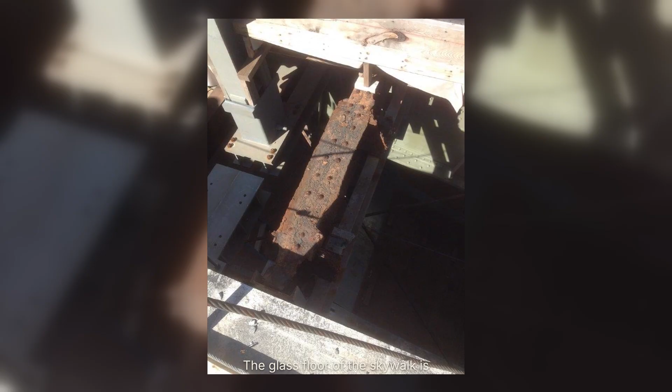The glass floor of the skywalk is transparent. Visitors stand on it and look down and see the valley, 225 feet below, the creek and the trees and the wreckage of the towers. They do not see the men who built the bridge, because there is nothing to see. No photographs, no payroll ledgers, no list of names.

The men existed for 94 days in the summer of 1882, and then they dispersed, and the bridge stood, and the bridge fell, and the valley holds what remains. 2 names in a coroner's docket, 11 towers on the forest floor. The record begins there and ends there, and everything else is silence.